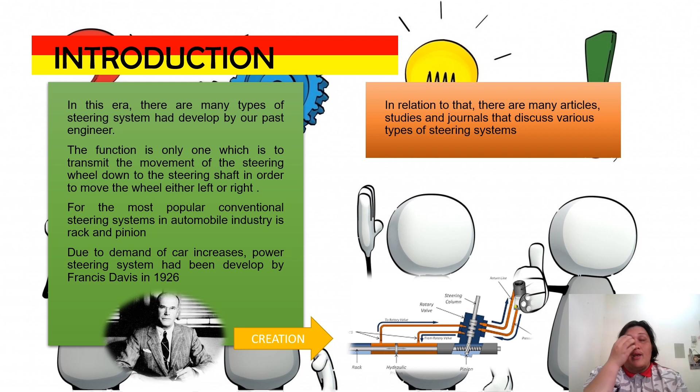There are many articles, studies and journals that discuss various types of steering systems. That's why we made a summary from these journals, so that we can learn more about the technology and development through reading them.

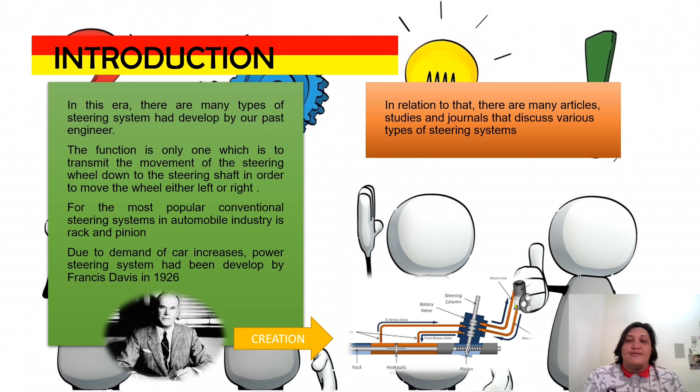So this is some of the literature review that we made, and we will explain in more detail on the next slide.

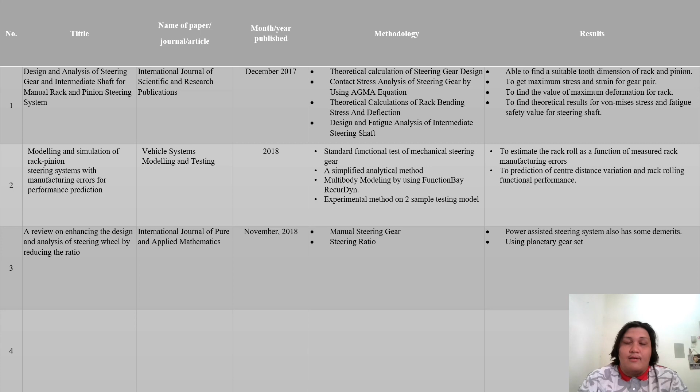For the first article: Design and Analysis of Steering Gear and Intermediate Shaft for Manual Rack and Pinion Steering System. This is my summary, so let's go.

For this journal, the methodology investigates the characteristics of a rack and pinion gear system, focusing on bending and contact stresses of the pinion gear and rack bending stress. They also use analytical and finite element analysis to find the life of the intermediate steering shaft in cycles, and determine the factor of safety of the shaft using fatigue analysis. Overall, they use ANSYS software to analyze the safety of the component.

There are two major analyses carried out in this project: the first is deformation analysis, and the second is stress analysis.

In this journal, they state three steps in the design and fatigue analysis of the steering shaft, which includes design calculation of the intermediate steering shaft. There are many formulas shown in the article and their study that they use to calculate the intermediate steering shaft.

They also calculate the stress analysis and fatigue analysis of the intermediate steering shaft. There are many calculations and formulas that they use for this study, and that's why they come out with a good result in such analysis.

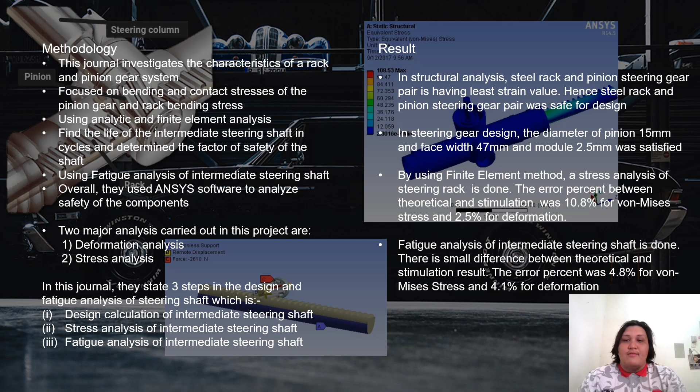In this article, they present the results of each test and analysis in a table, which we can see properly, but I cannot put it on this slide because it's very packed. So that's all from me. Thank you, and I will move on to the next part.

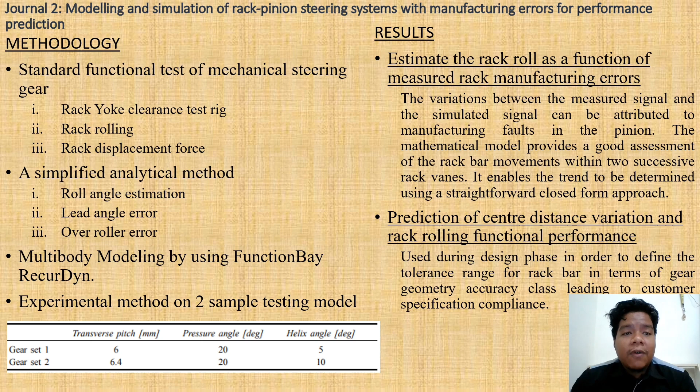I will continue for Journal 3, titled A Review on Enhancing the Design and Analysis of Steering Wheel by Reducing the Ratio. We got our journal from the International Journal of Pure and Applied Mathematics, published November 2018. The methodology includes manual steering gear and steering ratio, and the result is that assisted steering systems also have some demerits, and the last one uses a planetary gear set.

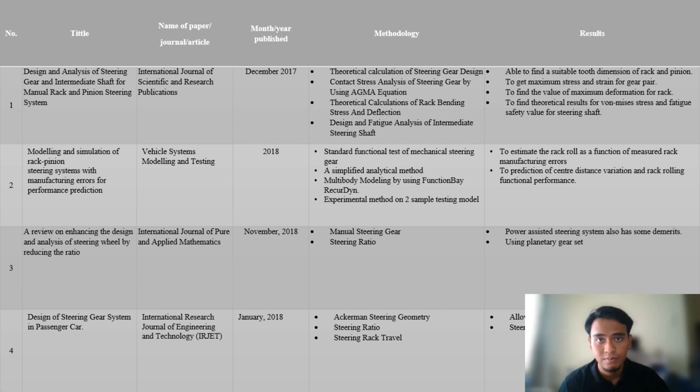Next, for Journal 4, the title is A Design of a Steering Gear System in a Passenger Car, published in the International Research Journal of Engineering and Technology, January 2018. The methodology is Ackerman steering geometry, steering ratio, and steering rack travel. The result is a development for four-wheel steering and steer power base with maximum maneuverability. That's all.

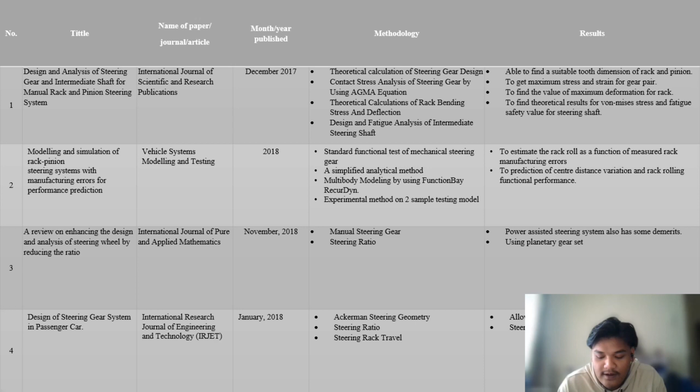Next for Journal 3, A Review on Enhancing the Design and Analysis of Steering Wheel by Reducing the Ratio. Let's take a look at our Journal 3 methodology. The first one is manual steering gear.

The steering gear's job is to convert the steering wheel's rotational motion into reciprocating motion in order to move the steering linkage. There are two styles in use: the rack and pinion steering gear and the pitman arm or reciprocating ball steering gear. The next one is steering ratio.

A certain amount of effort is required to turn the steering wheel. The mechanical advantage of the steering gear determines the amount of effort required.

The steering ratio is the proportion of degrees turned on the steering wheel to the total number of degrees turned on the front wheel. The ratio is specified for front wheel movement of exactly 1 degree. A 30 to 1 steering ratio, for example, means that the steering wheel will turn 30 degrees for every degree that the front wheel turns.

The steering becomes more difficult as the ratio decreases. It is easier to steer with a larger ratio. The steering wheel must be turned further to make a turn when the steering ratio grows.

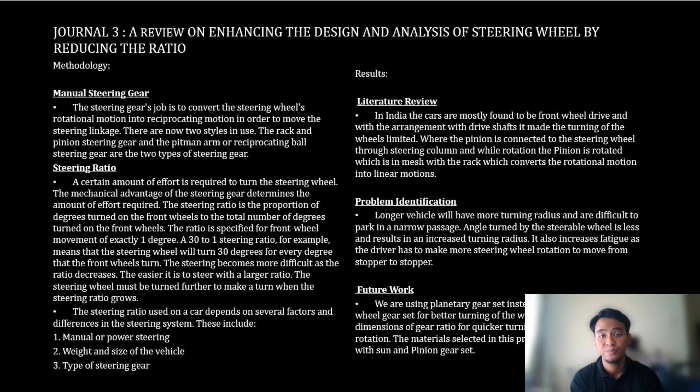So for the next, design of steering gear system in passenger cars. Okay, and next.

For methodology, analysis of the Ackermann steering system.

In Ackermann steering geometry, the outer wheel moves faster than the inner wheel. The intention of Ackermann geometry is to avoid the need for tires to slip sideways when following the path around a curve. The geometrical solution for this is for all wheels to have their axles arranged as radii of a circle with a common center point.

Understanding Ackermann geometry helps the driver avoid negative effects of cornering force acting on the vehicle and increases the space in the cockpit area and the comfort of the driver.

Testing in ANSYS 15.0. The simulation output of ANSYS 15.0 shows the deformation in the rack and pinion setup with the steering ratio and travel, giving the idea of how to construct a reliable version of the steering system with Ackermann geometry in four-wheel steering. The result of the simulation analysis includes total deformation of the steering rack at high temperature, factor of safety, and equivalent stress for the rack and pinion.

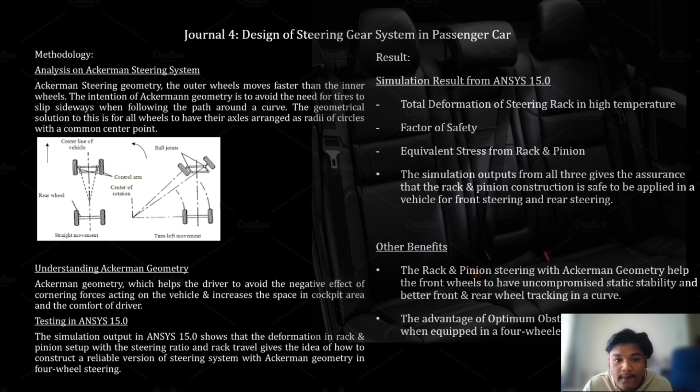For the conclusion of our assignment: the growth of technology in the automotive industry has expanded significantly nowadays, which has been implemented in the latest automobiles where few mechanical components are semi-electronically controlled. The traditional steering mechanism has also been upgraded with electronic assistance, transforming mechanical steering into a steer-by-wire method.

Despite the fact that the steer-by-wire system offers advantages over the conventional steering system, conventional steering is superior in one area: tactile input, which a driver demands when driving aggressively. That's all from us, thank you.